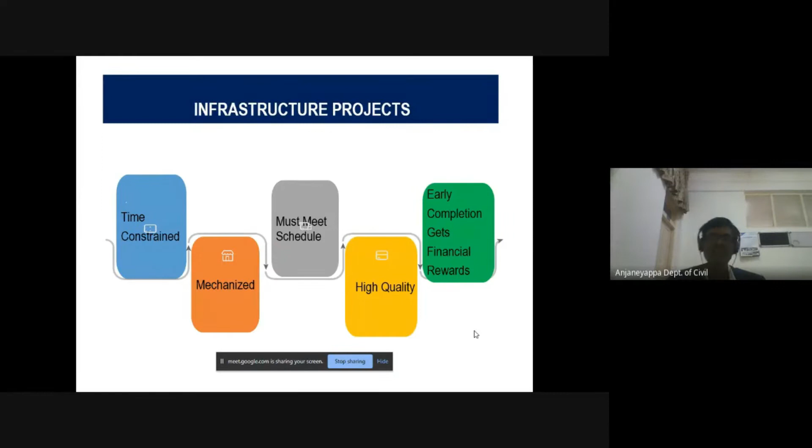Thank you. We cannot think of this high quality without these plants and machineries.

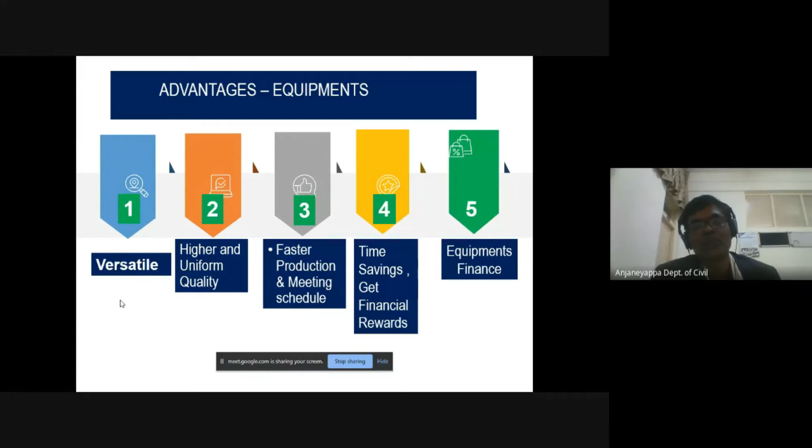There are some advantages when we are talking about these machineries for the road projects. The majority of these machineries are versatile, they can be used for different types of activities. Let's say the grader can be used for grading, can be used for mixing, can be used for even cutting. And the equipment delivers higher quality, not just higher quality products but also uniform quality. That's very important. And then we can meet the schedule, because production will be faster, construction will be faster, and because of this faster production we can save time. So many times, as I said, today's contracts have early completion financial rewards.

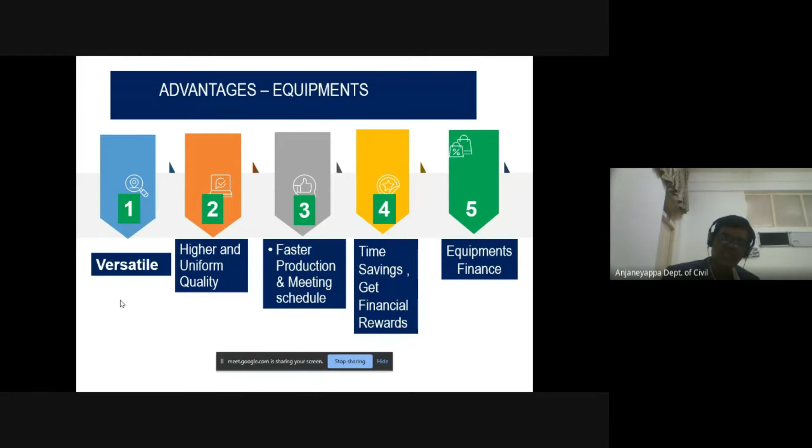When we look at the cost of equipment, as I said, they are very costly, there's no doubt about that. But again, for the owners, there are equipment financing institutions, so getting finance for these equipments is also easy. These are some of the advantages when talking about the equipments.

Having said the advantages, there are some limitations also. As usual, these equipments are very costly - the cheapest equipment, our roller, is about 20 lakhs. Also, underutilization increases the cost of the project - though we induct very costly equipment and plants for road projects, most of the time they are underutilized. This underutilization increases the project cost, and operation and maintenance cost is also very high for machineries.

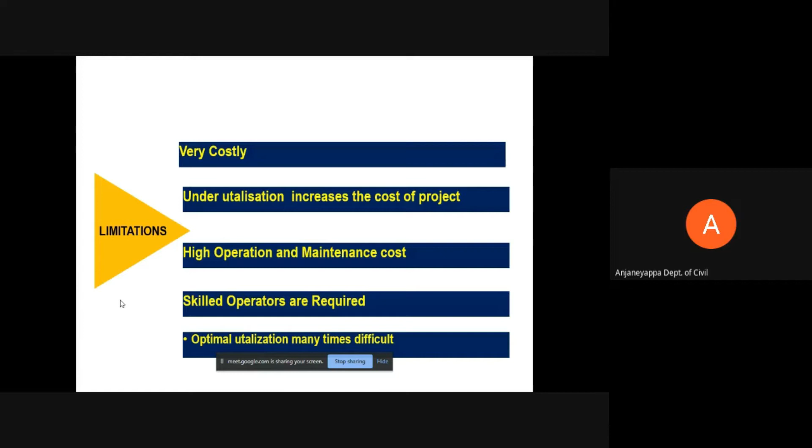It's about 15%, as a thumb rule. So a huge amount - if 15 crores it runs, and all highway projects, you may be aware, these people talk only in 100 crores, 200 crores, 300 crores. Even the smallest project, the PMGSY project, will generally be about 4 to 5 crores. So the operation and maintenance cost will also be high. More than anything, handling the operation of these plants and machineries requires skilled operators, and to be precise, there's an acute shortage of skilled operators in the industry for various reasons. So, some of the limitations.

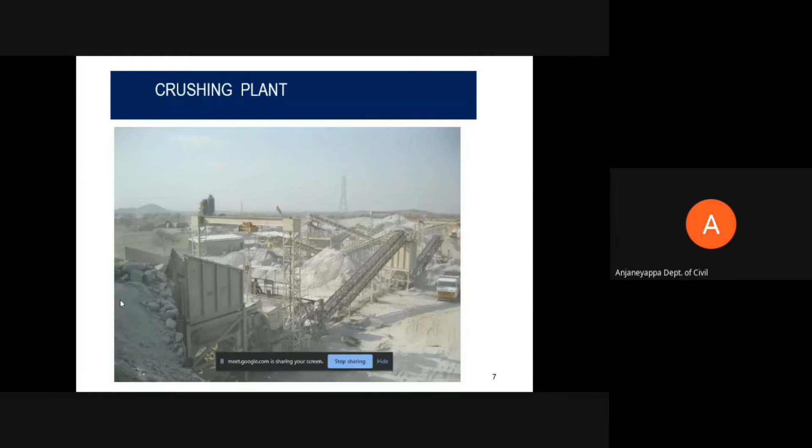Now, let's go to the plants, some of the important plants. This is a view of a crushing plant, an aggregate crushing plant. Go to any road project site, you'll find a crusher, and this is the crushing process from the quarry.

The rock is drilled, then blasted, made into bigger boulders, and these boulders are transported to the crushing plants through tippers. They are fed into primary crushers, and from this primary crusher it gets into the secondary crusher, and from the secondary crusher the output will be of construction size. Many times this secondary crusher output is again subjected to the tertiary crusher, maybe to control the shape and to increase the fines. That's how the crushing plant works - the boulders from the quarry are subjected to 2-3 stages of crushing.

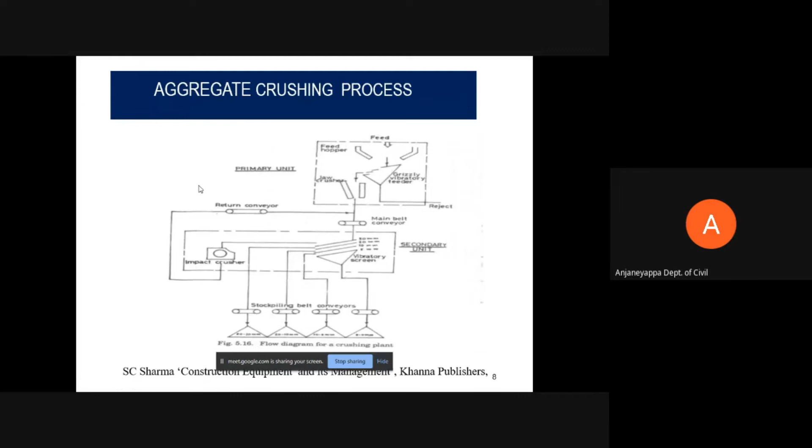If you want to classify the crushers, they can be classified based on mobility, or they can be classified based on function. When we classify aggregate crushers based on mobility, they can be classified as mobile crushers or stationary crushers. What is the advantage of these mobile crushers? The crushing can be done at various locations.

Many times it so happens for projects that we may not get the source of rock in one location because a huge quantity is required. So when there is a mobile crusher, this can be moved - mobility will be easy, it can be moved from one source to another, so crushing can be continuous and shifting is easy. That's the biggest advantage of mobile crushers, but there is a limitation - the output of these crushers generally will be less compared to stationary crushers.

Based on function, crushers can be classified as primary crushers. Generally, jaw crushers are used for primary crushing. In primary crushing, the input size is the boulders, generally varying from 600 to 1000 mm, around 1200 mm. The output size is our soling size, about 90 to 100 mm. So we feed the boulders into the primary crusher, and the output we get is of soling size.

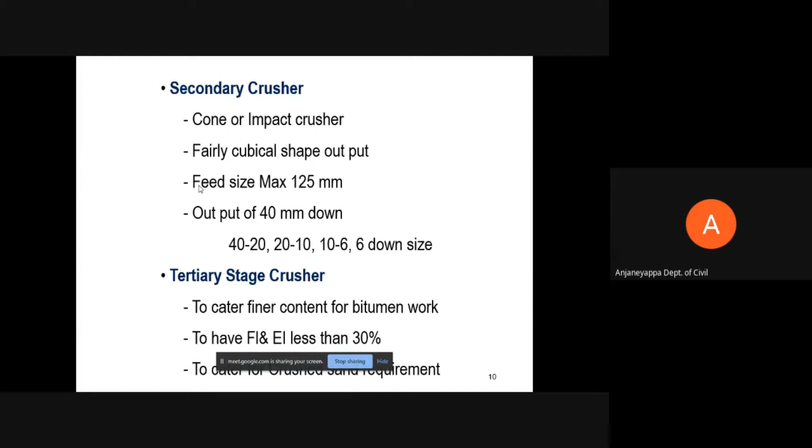To have good shape, many times the elongation and flaky particles will be more in the output. So to control that, the tertiary stage crushing is carried out.

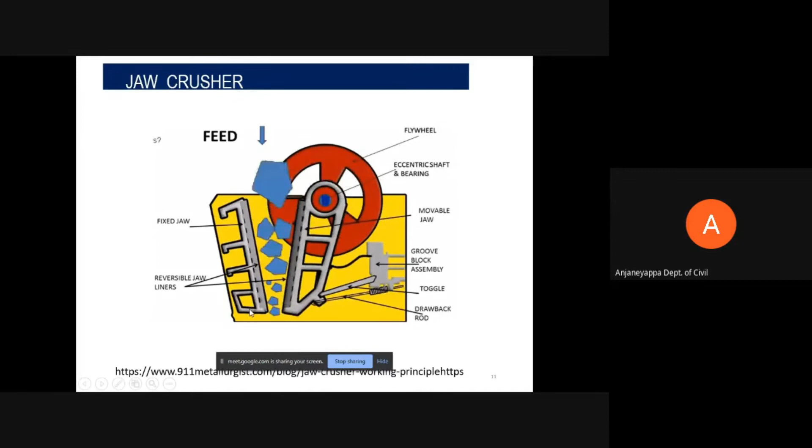This is another view of the jaw crusher. In the jaw crushers, as you have seen in the picture, one is the fixed jaw, the other one is the movable jaw or the swing jaw. These jaws are made up of heavy duty cast steel or manganese chrome steel so that they can sustain the high vibration, wear and tear during the compression.

More is the production that we get when the feed is of mixed size. Whatever the feed input size, this applies even for other stage crushers also. Always when mixed size aggregates are there in the feed, we get more output. Uniform size always gives lesser output. Another important requirement to have good production is the feed should be uniform. Most of the time it does not happen - sometimes there is more feed, sometimes there is no feed, sometimes there is underfeed. So giving uniform feed to the crusher always results in more production.

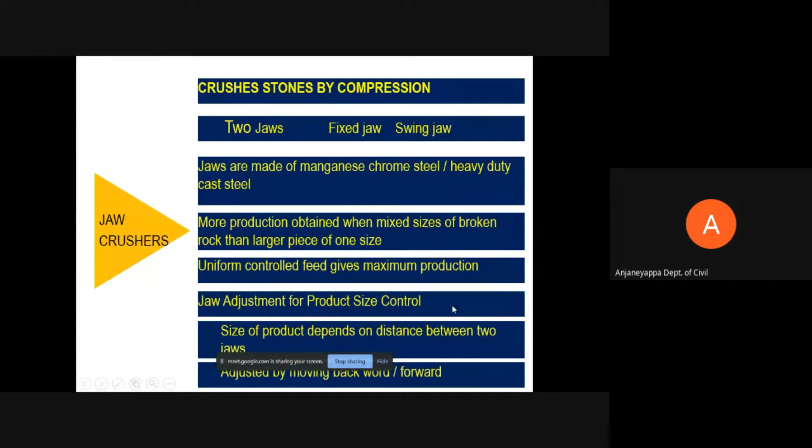So we need to adjust the jaws to control the size of the output. We can have three combinations between the fixed jaw and the swing jaw. One is straight jaw, where both the fixed jaw and the swing jaw are straight. The advantage of this combination is the wear and tear will be uniform, and the disadvantage is the rocks, the output, hangs up here. Because of that, the output may reduce many times. Another disadvantage of having both straight faces is it produces more elongated or flaky particles.

The other combination for the jaws in the jaw crusher is one kept straight, the other kept curved. As I said, uniform feeding is not always possible, so in such cases this is advantageous, and the crushing area increases here, so output will increase.

The other combination is both jaws kept curved, both fixed and swing jaw. The advantage is it reduces the choking, and this combination is helpful when feeding is less or not uniform. The crushing height is increased here compared to straight jaws, the crushing area is increased, and the flaky and elongated particles are further reduced if this kind of combination is adopted in the jaw crusher.

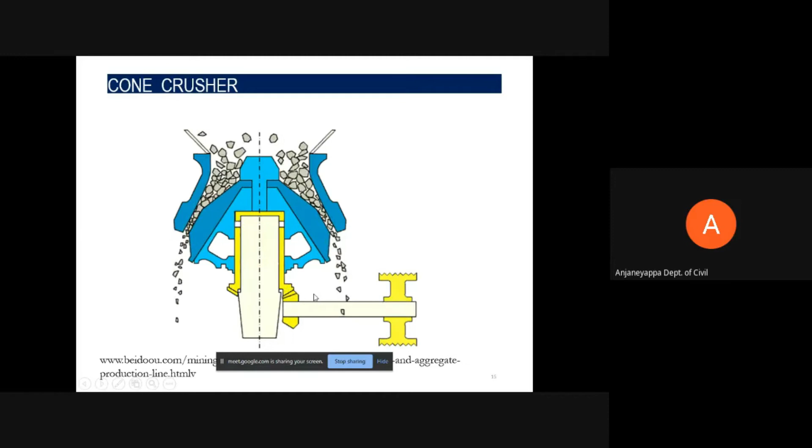This cone crusher can be used to generate construction size output, meaning we get whatever size is required for construction. The gyratory head generates the gyratory motion, and the swinging motion is produced by the eccentric sleeve.

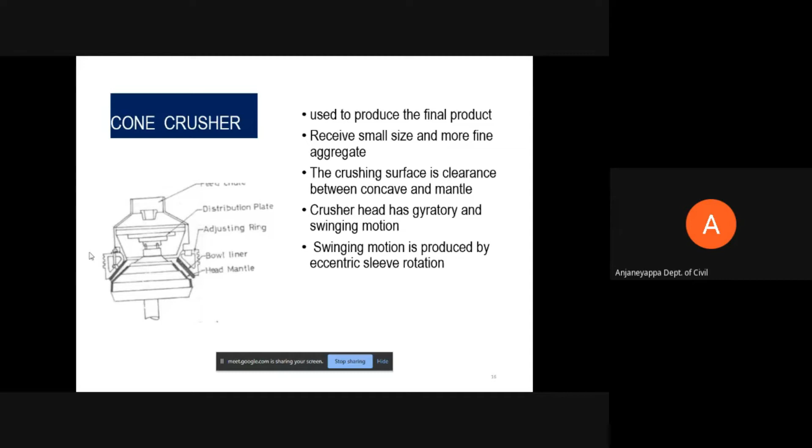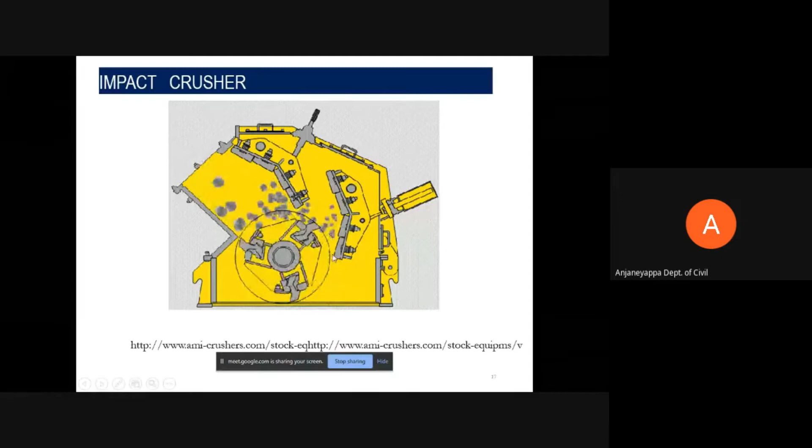The other type of crusher is the impact crusher. This is also used as a secondary or tertiary crusher. This is where the input from the secondary or primary crusher gets in, and you can see the hammers, and this gap between the hammers and the rotor dictates the output size.

So both the jaw crusher and the cone crusher break the aggregates by compression. Here in the impact crusher, it is impact which breaks the aggregates. This impact crusher can also be used as a primary crusher, and impact crushers are used when materials are too hard and when good shape of aggregates is required.

The input is fed here from the top, and the material is struck by these rotating hammers in these chambers. These hammers repeatedly throw the material, and the impact generated is instantaneous. This instantaneous breaking eliminates the possibility of hidden cracks in the output, which is desired.

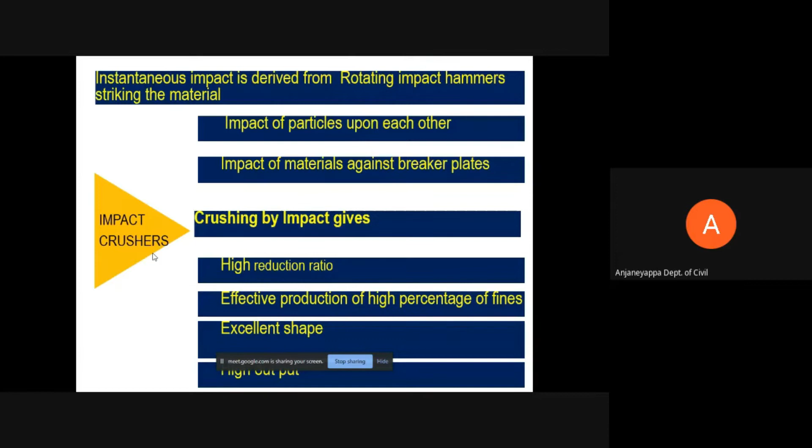The impact crushers have a high reduction ratio. That means the reduction ratio is very high, and the biggest advantage is we get a very desired shape and also very high output from the impact crusher.

If you look at the reduction ratio of a jaw crusher, it is 4:1 to 9:1. This reduction ratio is the ratio of feed size to output size. Here it is 4:1 to 6:1, and here it is 15:1 to 20:1.

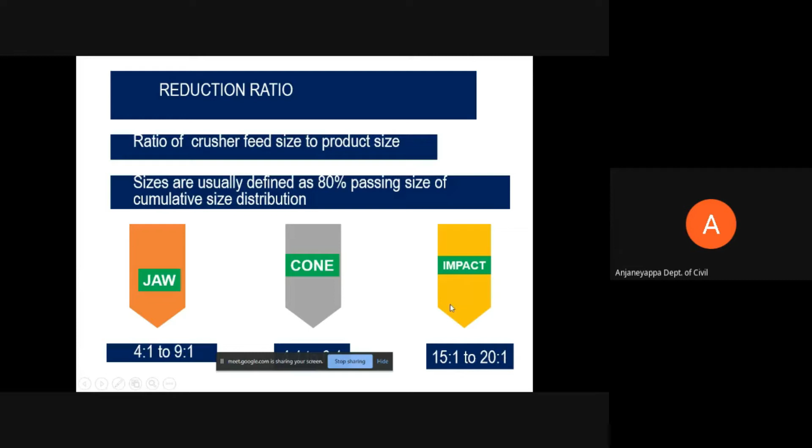So a high reduction ratio is expected, and it is very important in crushing to adopt step reduction. A large difference between the input size and output size requires huge energy, and if that difference is very high, excessive fines and excessive sand are also generated. Hence it is always desired to adopt stage crushing.

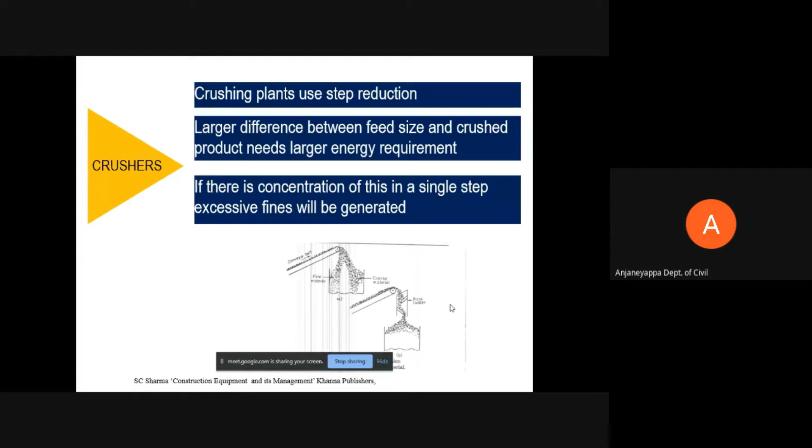The output of the crusher depends on the jaw opening. Lesser the opening size, lesser will be the output. What is the end product size required? Bigger size means more output; lower size requirement means lower output.

The kind of rocks, whether the input is softer or harder quality, dictates the output. Then feeding efficiency - whether feeding is continuous or not - matters, as more and uniform feeding always gives more output. It also depends on density: more density means more output. Water absorption - if water content is lesser, output will be more - and specific gravity is inversely proportional. Smaller size feed always generates more output.

So that's about my crushing plant.

Then comes my pug mill or the wet mix plant, used for the production of wet mix, which is widely used as granular base in our country. So this is the wet mix plant at the pug mill.

You can see these are the hopper bins, cold aggregate feeder bins, and there's a conveyor belt, a pug mill or mixing unit, and of course a control panel.

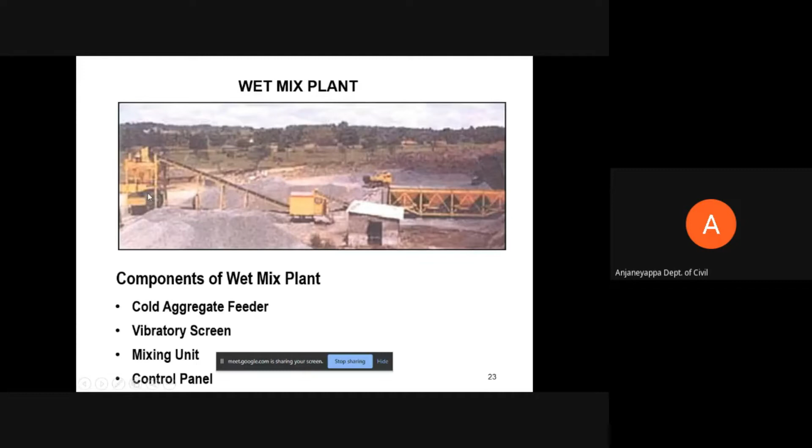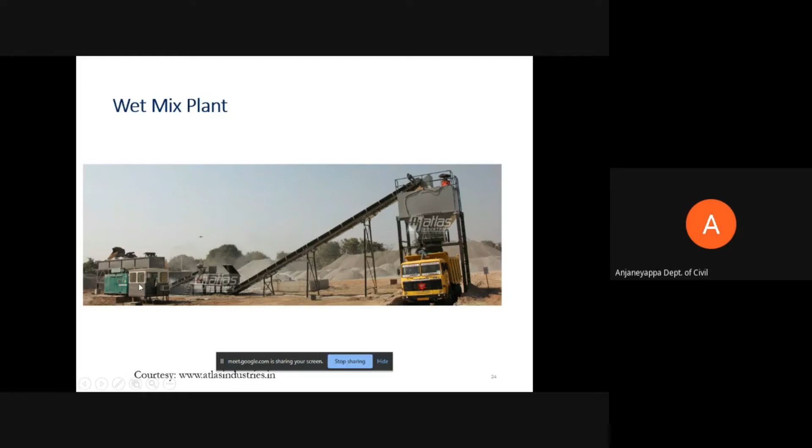So this is another view of the wet mix plant, and all the operations are controlled by the control unit here. This is another view.

Then comes our hot mix plants, used for production of bituminous mixes. There are different types of hot mix plants: mini plants, portable plants, and stationary plants. This is one way of classifying hot mix or bituminous plants. The other classification is drum mix plants and batch mix plants.

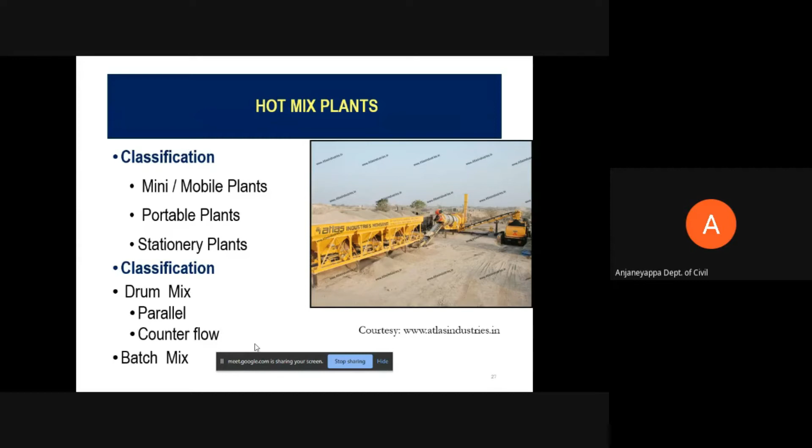Let's look at these mini plants. The name itself indicates they are used for small road projects, and most of the time these mini plants are used for maintenance activities. They can be moved easily on pneumatic wheels, and can be easily installed and transported in a tipper or big trailer - that is the big advantage. The main disadvantage is they are not suitable for major projects, as the output is less from these plants.

Then comes the portable plants. Again, these portable plants can be transported easily on road or by rail. The capacity varies starting from 10 to 45 tons per hour, and this can be used for a job site of 30 to 40 kilometers. The biggest advantage of these portable plants is they can be shifted easily from one project site to another.

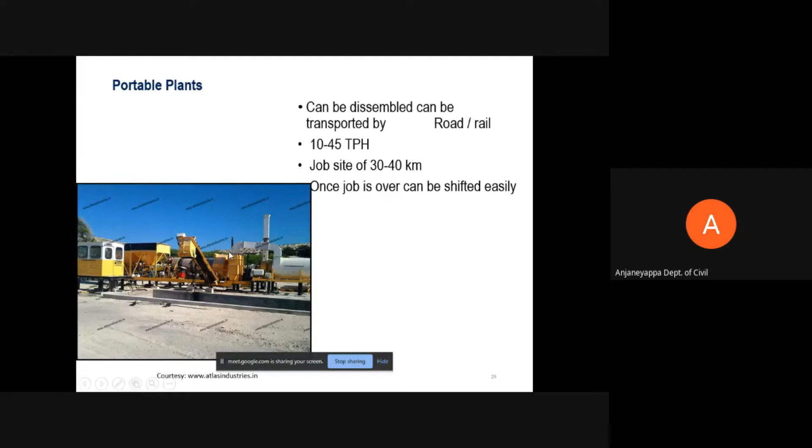So then comes the other type of hot mix plant, the stationary plant. These stationary plants are installed on a permanent site. As I said, these stationary plants have a capacity of generating anywhere from 60 TPH (tons per hour) to 200 tons per hour, or even more, 300 also. These are used for major road projects and suitable for a job site of 50 to 60 kilometers or even more.

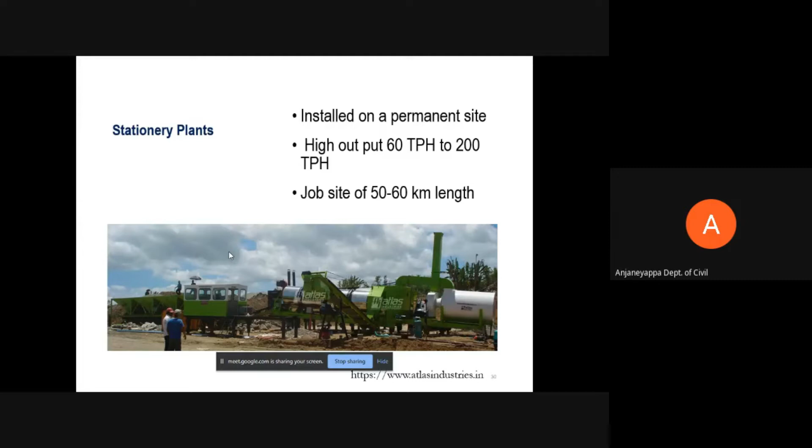The other classification in a hot mix plant is drum mix plants and batch mix plants. So this is a typical drum mix plant. You have hopper bins, drums, a mixing unit, and this is the loading unit, and the control room.

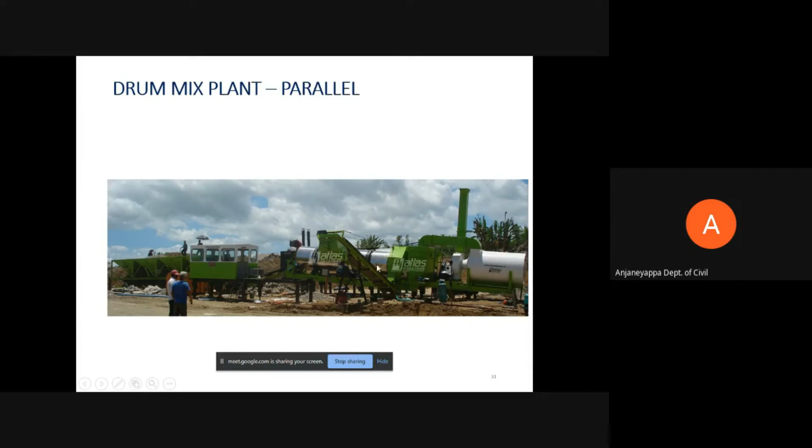In the drum mix plant, we mix from these aggregate bins and get into this burner. If we want the RAP mix, any recycled material, it is added at the end of this burning and heating, then taken to the storage bin and to the loading bin. From the hopper bins, the aggregates get into this drum, where they are heated to the required temperature, and from here the materials get into this drum. Bitumen is pumped here, aggregates and bitumen are heated together, and then it goes to the loading unit.

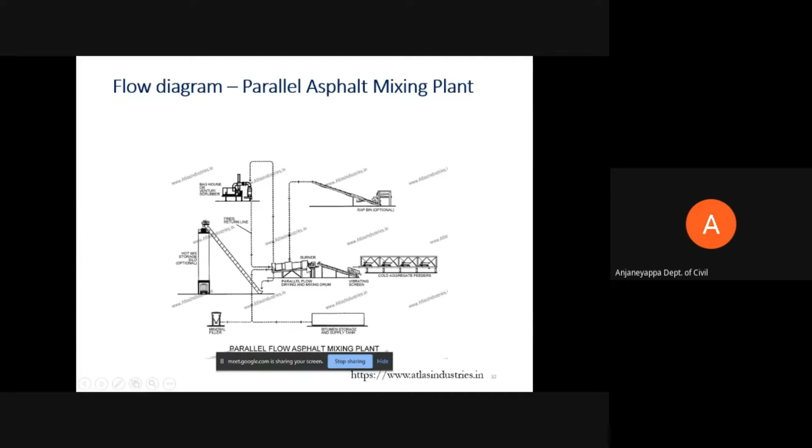Then comes the weighbatch plants, or batch plants. These are typical weigh batch plants with hopper bins, a drying unit, and a mixing unit. From the hopper bins, aggregates are fed into the drying units where they are heated to the required temperature. After heating, the aggregates are elevated through the bucket elevator to the screening unit. The hot aggregates are sieved first, then weighed, and after weighing, fed into the pug mill or mixing unit, where preheated bitumen is also fed. Both are mixed, and the mix is unloaded onto the tipper or to the storage silo.

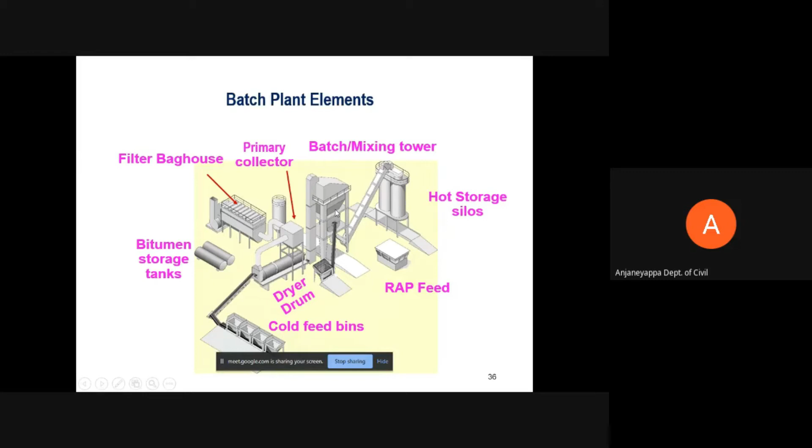The aggregates from the hopper bins are fed into the dryer drum, then taken to the screening, then weighed, and then mixed. This heated aggregate from the dryer unit is sieved into separate size bins, 20mm, 12mm, 6mm, and so on, and separately weighed. Then, into the mixing unit, the preheated bitumen is pumped.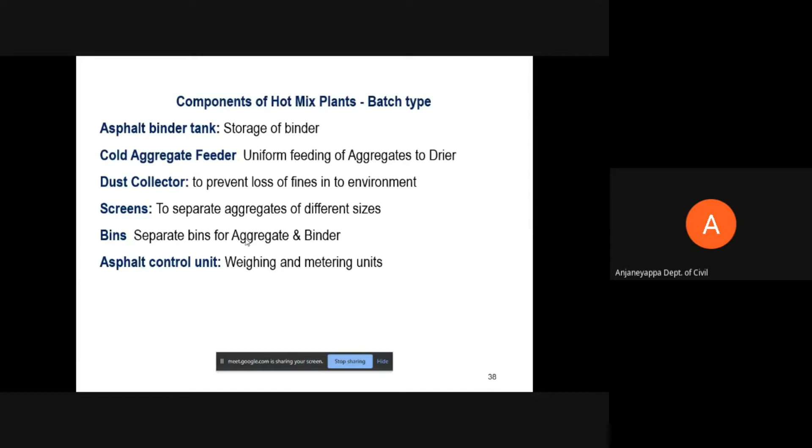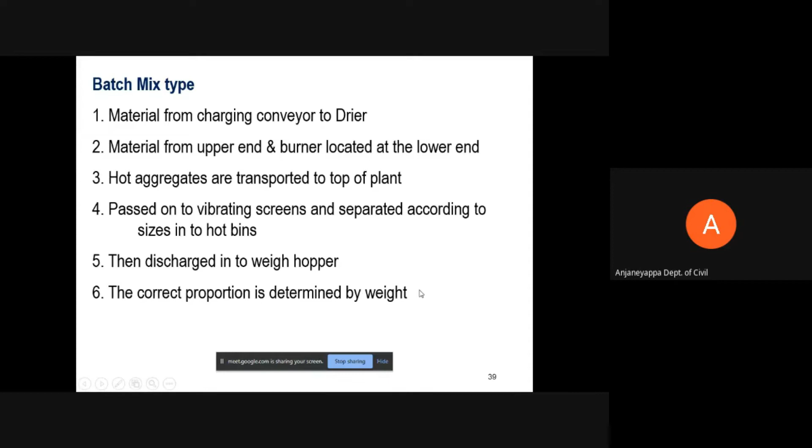So we have the bitumen storage tank, cold aggregate feeder bins, dust collector, screening, aggregate bins, and control unit. All these mixing operations, starting from the dryer, the hopper bins, aggregate hopper bins, cold feeder bins, to the output, happen in about 30 seconds.

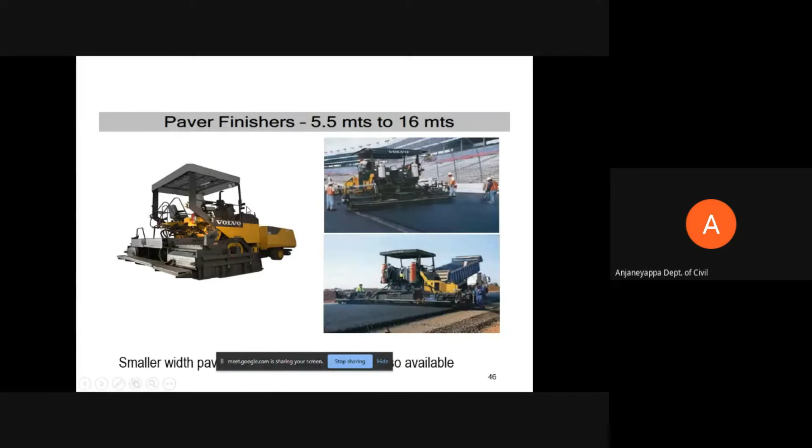So that's about the hot mix plants. Now let's discuss the pavers. There are different types of pavers available, starting from 2 meters to 16 meters. Generally the common pavers are 5 to 9 meters; this is an 8 meter wide paver. If you take any paver, generally it has two sections: one is the tractor, the other is the screed, and these two components are connected by a tow arm.

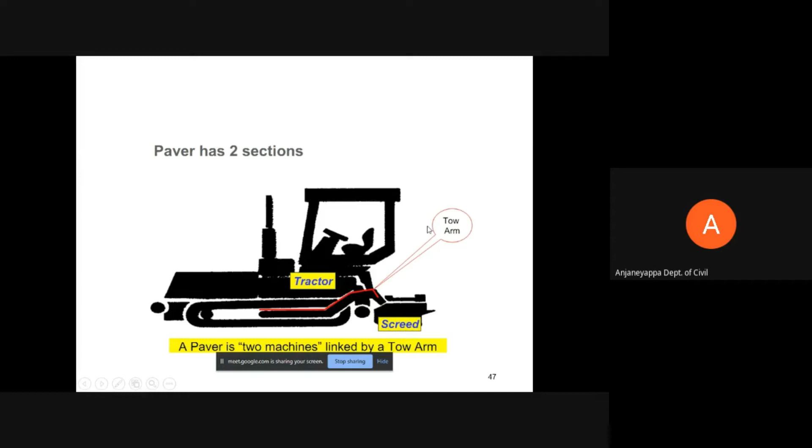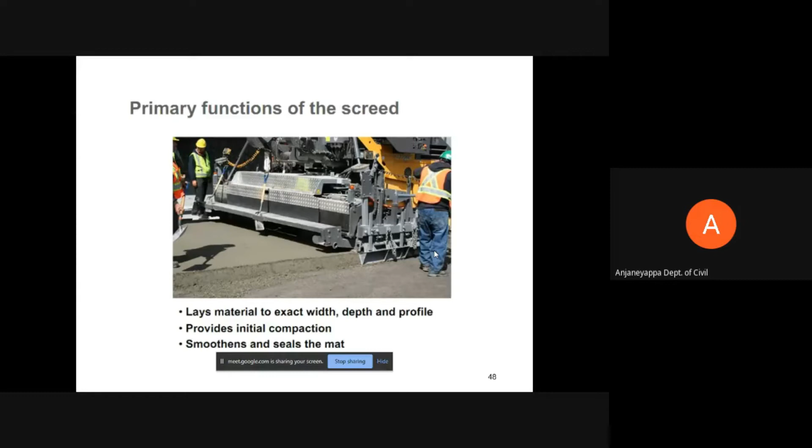One is the track mounted paver, the other is wheel mounted paver. There are advantages and limitations of these two categories. If there is a wheel paver, mobility and performance are easy, but the only limitation is it cannot be operated on relatively soft bases, and maintenance is also high compared to a crawler or track mounted paver.

The advantage of a track driven paver is we can pave higher lift thickness, larger widths, and it can be operated on relatively soft bases. Let's remember, paving is not done on soft bases - I am using the term relative. It can be effectively used on gradient surfaces, whether up gradient or down gradient, compared to the wheel driven paver. There are two types of screeds attached to the paver: fixed and variomatic.

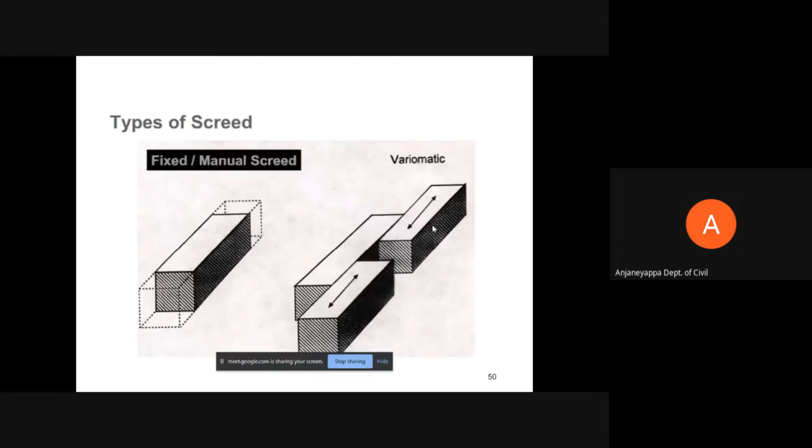Sensors - today paving is mostly done by sensor pavers, because all organizations ask for sensor pavers. Different types of sensors are available in the market: contact sensors, non-contact sensors, or a leveling beam.

This is a contact sensor - it floats on the reference surface, and this is sensed by the paver, and accordingly we get the profile. The non-contact sensor is made to sense the reference surface, and as per the reference surface we get the surface. There is also a floating beam which can rest on the reference surface, mostly the receiving layer. In all these cases it is the receiving layer whose profile is taken as reference.

Otherwise, this sensor can be made to sense the guiding wires as the reference.

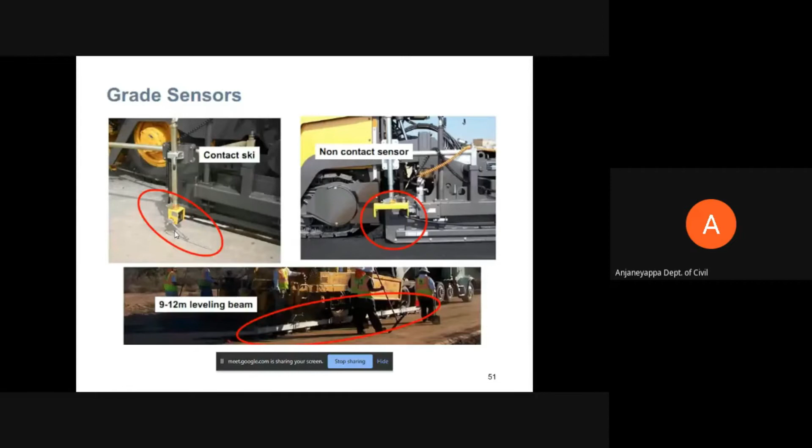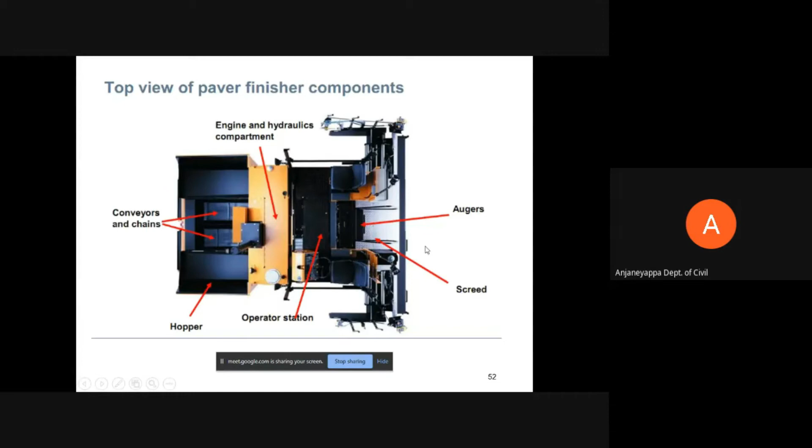These are the components of a paver. There are augers here, and this is the hopper bin - these two are very important: the screed, the augers, and the hopper bins. This is another view of the components: hopper bin, auger, screed, and so on.

What is more important when we talk about paving is maintaining a uniform, constant head of material in front of the paver - this is very, very important. Whatever be the type of paver, maintaining a constant head in front of the paver is essential, otherwise we may not get a uniform surface.

If the head of material in front of the auger is more, the thickness of paving automatically increases, which may result in non-uniform thickness and non-uniform profile. Also, when the head of material is less in front of the auger, the paving thickness reduces, again resulting in non-uniform profile. So maintaining a constant head in the paver is very important, and paving is an art.

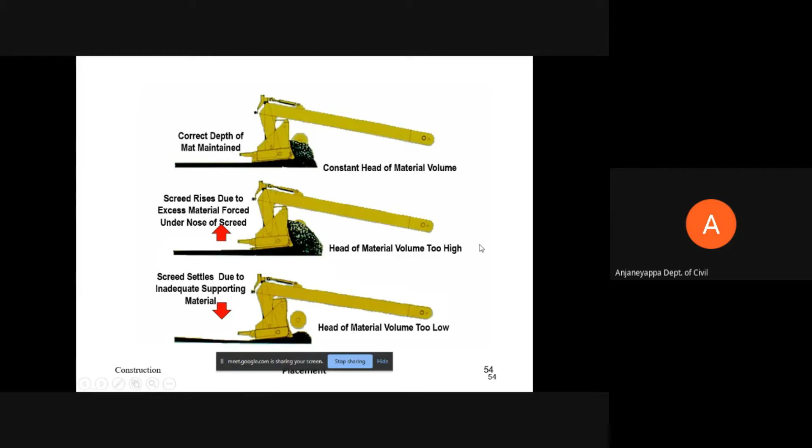More than engineering, paving is an art, and paving is a continuous process. Any paving should not be stopped unless there is a genuine reason. Once we start paving, we should not stop - we should not stop unless warranted. Only then do we get a uniform surface.

Whenever we stop the paver, it creates a weak plane, and the first failures generally occur wherever we stopped, because wherever we stop and start the paver, we get a temperature segregated surface, or aggregate segregation will be there - totally we get a weak plane. So as far as possible, paving should always be continuous, though most of the time this does not happen. So segregation is very, very important.

Most of the time, whether it is any bituminous mix, gradation is important. Hanging up of the aggregates in the feeder bins, maybe because of moisture or so, results in non-uniform mix which may not meet the required gradation.

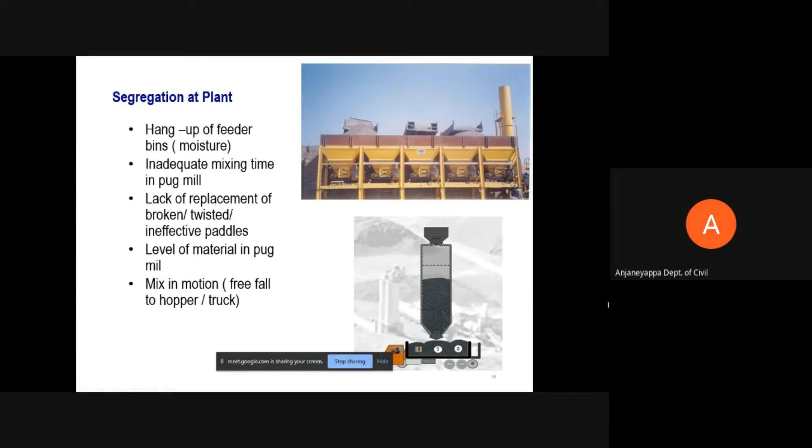This picture shows how the mix is loaded in the tipper. First loading is done here, second loading done here, and third heap unloading is done here in the center. This reduces the segregation to a certain extent.

So that's the segregation in the plant, and this segregation also happens in transportation. During movement of the mix in the tippers, the coarser materials roll down and segregation can happen. Segregation is the separation of bigger size particles from smaller size particles, and this cannot be avoided completely, only minimized.

Controlling segregation is very, very important - I would say the most important thing. So we should not carry a small batch of mix in a large truck. Whenever we are carrying the mix in the tipper, it should be full.

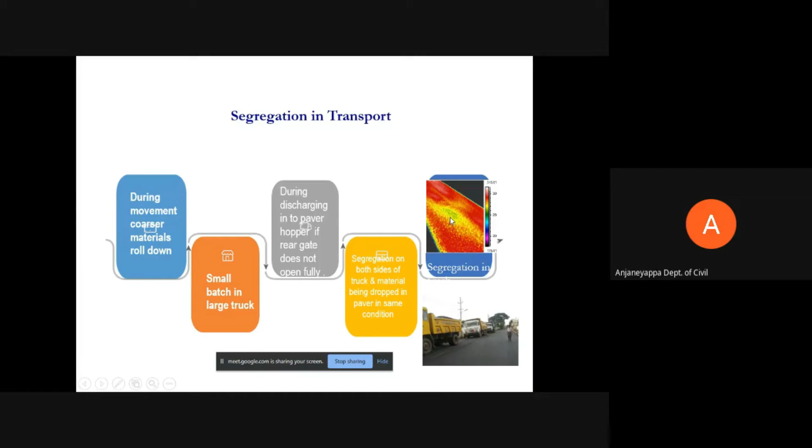Even during discharging the mix from the tipper to the paver, if the tipper gate is not opened properly or fully, then also segregation happens. So segregation is one part. As I said, temperature segregation is another issue we need to be very careful about.

The hopper should not be emptied - material should always be maintained in the hopper bin of the paver. This picture shows an empty tipper - still work is on, and the tipper is empty, and the paver hopper is empty. This results in a segregated surface, non-uniform profile, etc.

So maintaining this is the reason paving should always be continuous, and to have this continuous process there should be synchronization of all activities, starting from the hot mix plant, the number of tippers required, the distance, and then paving. All this should be coordinated or synchronized, so that once we start the paver, the paver does not stop.

So the paver speed should be adjusted based on the distance from the hot mix plant to the job site and the capacity of the hot mix plant.

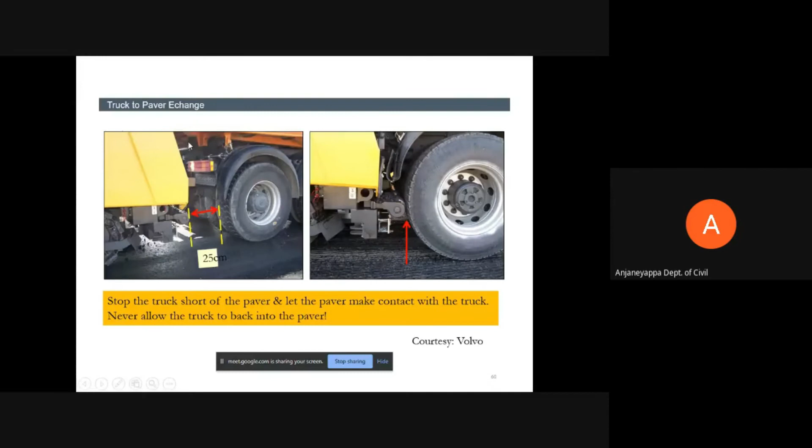When loading material onto the paver from the tipper, the tipper should move slowly near the paver, and the paver will come and join the tipper. The tipper should be at a place, and the paver slowly comes and joins it, then the material should be unloaded. Otherwise there'll be an impact, resulting in a non-uniform surface.

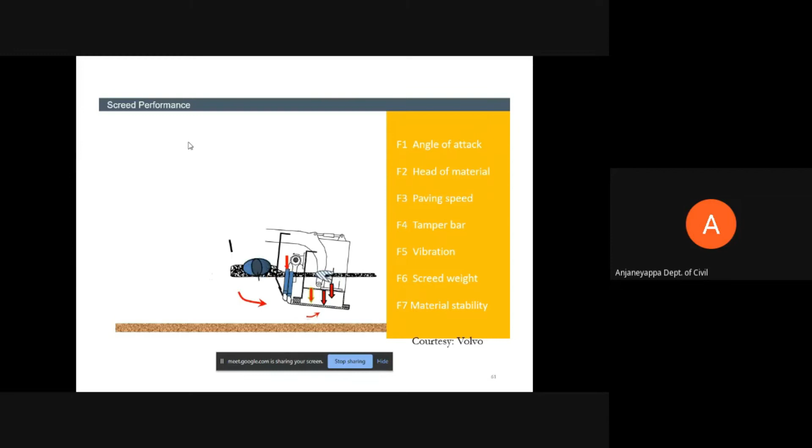So whenever we want to increase or decrease the thickness, that change does not happen instantly - it takes some time, some distance.

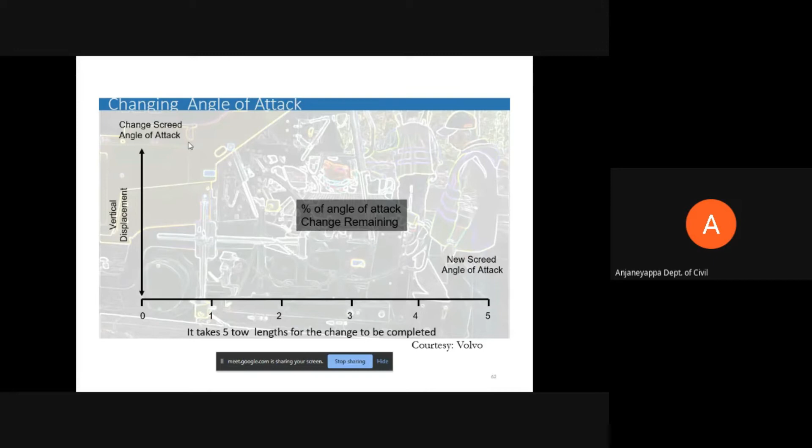Generally, about 15 to 20 meters is required to change the thickness in the case of a manual paver. In case of a sensor paver, about 10 meters length is required to make that change happen. So instantly by operating the lever or the gear, changing the thickness will not happen.

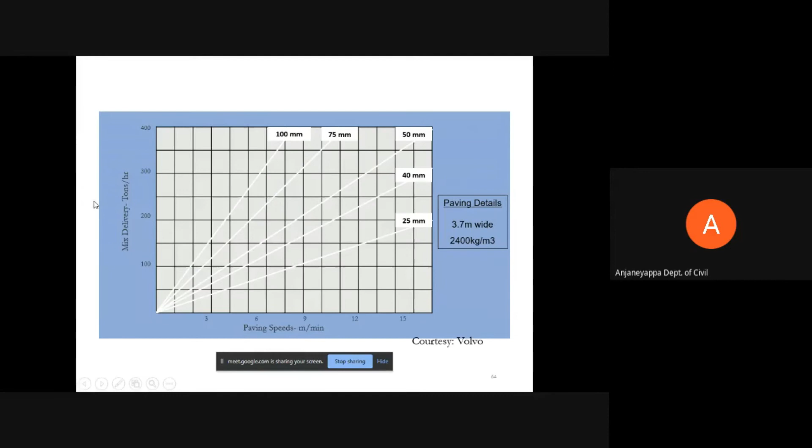So depending upon the paver speed, the plant capacity, and the thickness, we should decide the paver speed - the thumb rule. Let's say my plant capacity is 100 tons, my paving thickness is 40 mm, and my speed should be 3 meters per minute per lane, assuming my density of material is around 2400 kg per meter cube. So the paving speed is adjusted based on the thickness and the capacity of my plant.

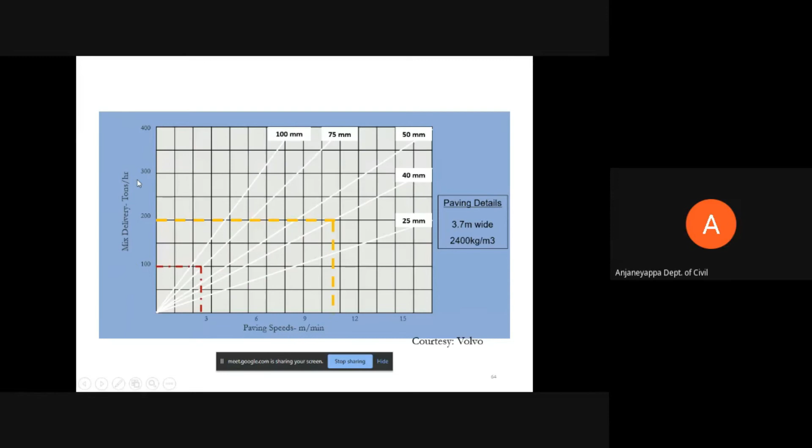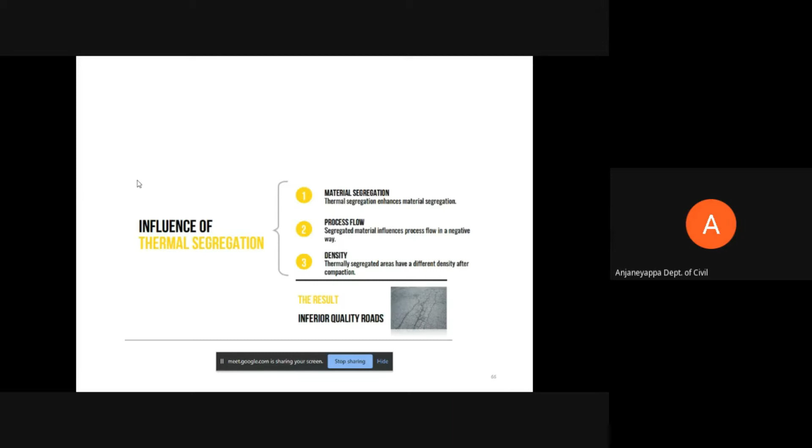Thermal segregation can happen at many places. This thermal segregation happens because the bituminous mix is thermoplastic and highly dependent on temperature. So controlling the temperature is very, very important - otherwise it results in a poor quality surface.

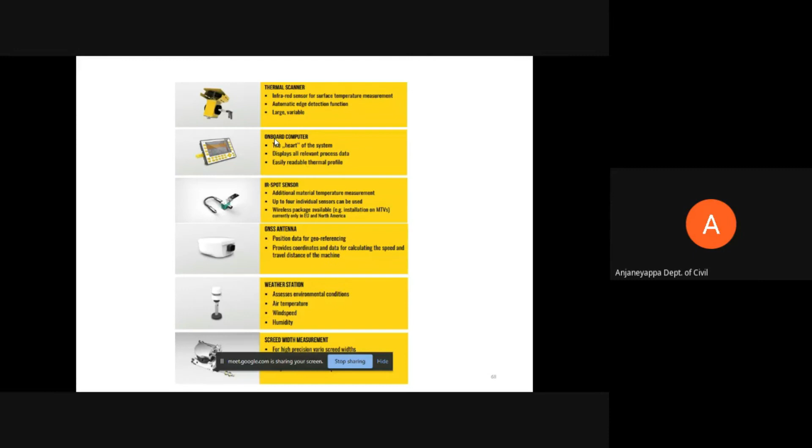By controlling the temperature, we can have different adjustments. These come as extra attachments to the paver - antennas and thermal scanners - so that temperatures can be scanned, and on the paver board itself the operator can see the temperature, the weather, and the width, etc. All these can be readily seen, and can also be readily seen in the centralized plant. This helps in controlling the quality, as well as in managing the project.

Then comes our rollers, the compactors. There are 4 types of forces that we impart to the rollers: static, kneading, impact, and vibratory or oscillation forces. The static and kneading forces are lower forces, while the impact and vibratory oscillatory forces generate higher forces, so the density also will be more.

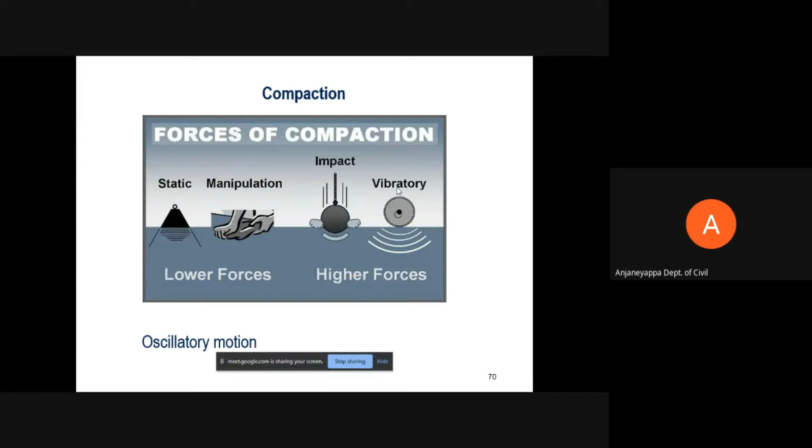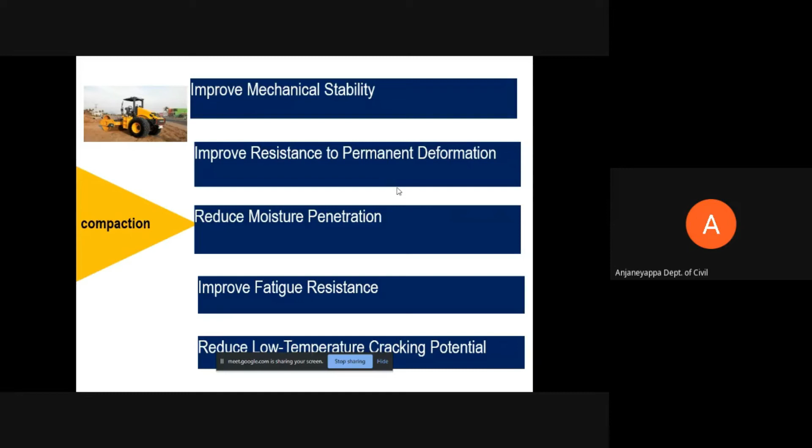The intention of compaction is to increase the stability of the asphalt mix, increase the resistance of the mix towards permanent deformation, reduce moisture penetration, increase fatigue resistance, and reduce the low temperature cracking potential.

There are different types of compactors: static compactors, kneading compactors, vibratory or oscillatory compactors, and light compactors. Static compactor generally means the soil compactor. All compactors can be operated both in static mode and in vibratory mode. If you switch on the vibratory mode, they act as vibratory rollers; if switched off, they act as static rollers.

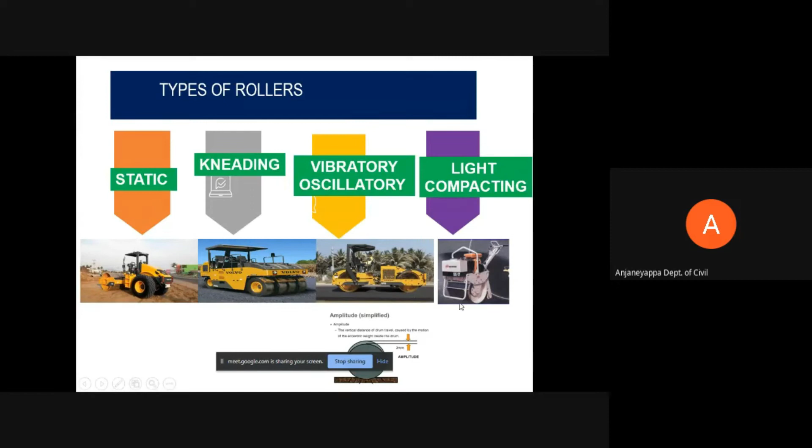Kneading compaction is generally done by pneumatic rollers. The force is generated by kneading action, while vibratory or oscillatory motions generate high forces. For constrained areas, we go for handheld equipment.

When talking about soil compactors, when is it called a soil compactor? When there is only one single drum, then we say it's a soil compactor. If there are two steel drums, then we say asphalt compactors or double drum compactors.

For a static roller, the compaction efficiency or output depends on the gross weight of the roller, the speed, the material type, and the thickness of the material. All these govern the compaction output or density level.

For a kneading compactor, it is articulated and cannot be operated in vibratory mode. Whatever gaps are seen in the front row on the rear side are filled by rear side tires, making it a continuous operation. Whatever gap is seen is covered by the rear end pneumatic wheel.

This compaction is by kneading, and the big area inside can be ballasted using any material to increase the weight of the roller depending on density requirements. Generally, pneumatic rollers are not used to increase density; mainly they are used to get the desired texture or to seal the surface. This comes under asphalt compactors, both of which are steel drum.

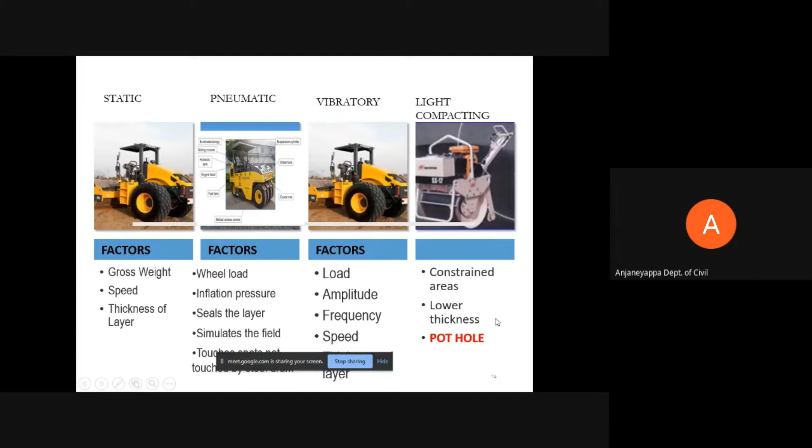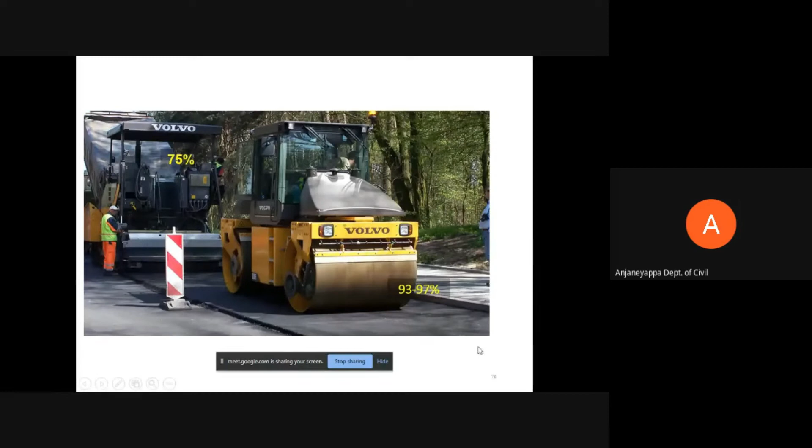The majority of the compaction is done by the paver itself; only the remaining compaction is done by the rollers. About 70 to 75% is done by the paver, and only the remaining portion, about 20-25%, is done by these rollers.

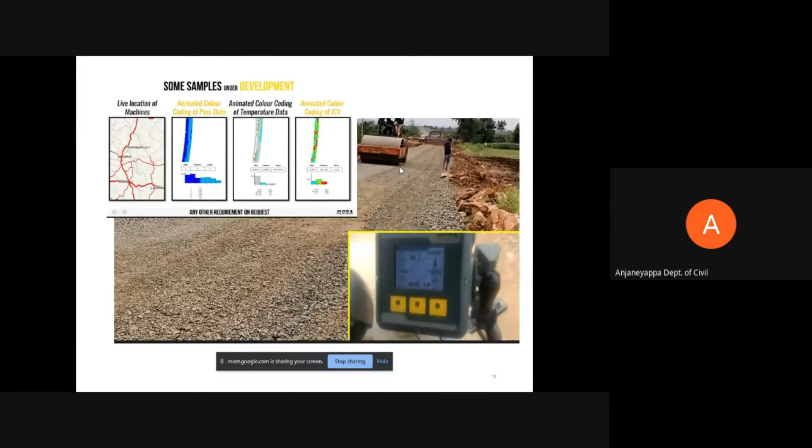There are customized attachments to show the density of the bottom layer in the roller itself. These additional attachments can be fitted on demand, giving the live location of the pavement and the temperature or density achieved, so that we can optimally use these machines and stop once the required density is achieved. All these can be used as additional attachments with minimal investment cost.

There are some precautions to be taken during rolling. Maintaining uniform speed is very important, and we should not allow the compactor to stand. Jerky starts, sudden braking, and sudden changes in maneuvering are not desirable, as that damages the surface.

This small amount of detergent or vegetable oil to be used, other than water, and the performance chart of these equipments needs to be taken from the equipment manufacturers. Generally, neither they give nor we, the customers, ask for it. That's really a good thing we should start doing from now onwards.

So there are some big concerns when you're talking about these equipments. We have talked about all these equipments.

But again, when we're talking about these plants and machineries, there are some constraints. Say, for example, my crusher is 200 tons per hour, pug mill is 100 to 200, my hot mix capacity is 200, and my paver capacity, compactor capacity, I've taken just on the lower side, 500. So synchronizing the capacities of machines is very important, otherwise one machine will be overutilized, another underutilized, so the optimization will not be there.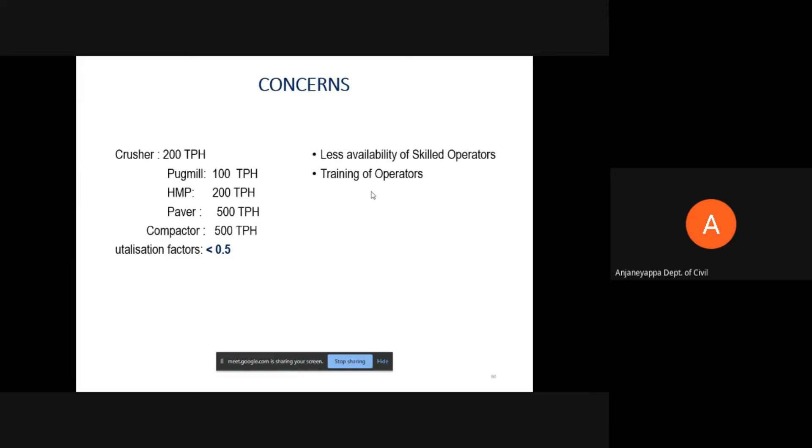So that is one biggest concern, and as I said, skilled operator availability is very, very less in the industry, and training this operator is another important requirement in the industry.

Another concern with these plants and equipments is the diesel consumption, the fuel consumption, which is very high. As a thumb rule, it comes to about 10,000 liters per kilometer per lane for new construction. Otherwise also, if you look at the fuel consumption for these equipments, from crusher to compressor, it varies from 5.5 liters to 60-70 liters per hour.

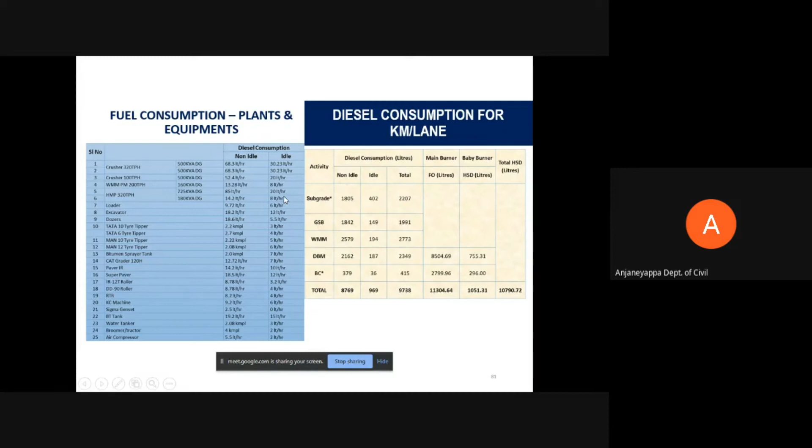Once we start, a huge quantity of diesel is required. That's what we need to understand.

So fair knowledge of these plants and equipments is most important for the project manager, the site engineer, or even for the operators. Otherwise, optimization of the project resources will be difficult. This knowledge is very important to keep the financial condition of the project healthy, to increase the profit, and to complete the project as per schedule. This knowledge of plants and equipment is very, very important.

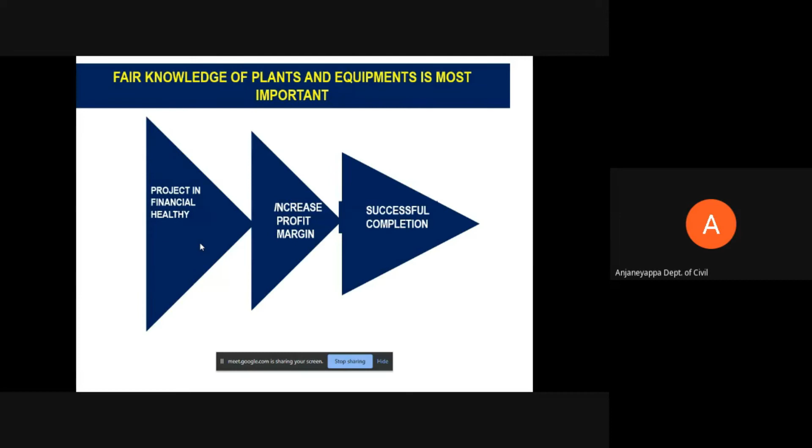One small concern I missed in this slide is that a trained operator is very important, because they are something like cooks. We have all these beautiful, costly machineries, but at the end of the day, the operator is very important. If we do not operate in the right way, that results in poor quality mix and poor quality product. That's very important when we talk about plants and machinery.

So I think my presentation is complete now. Any clarifications, I'm happy to share. Over to you, thank you.

Thank you, sir, for your wonderful presentation. You have started with the crushing and ended with the paving. You have taken the entire life cycle of the machinery, all the machines used for highway construction, and it's amazing, including the technology, the applications, how it works, including the PTR, the pneumatic tire roller.

See, highway construction happening in this space without machinery is not possible. As a civil engineer, we think why we should understand about the machine. Mechanical engineers are there, they will do the machines, but actually they manufacture the machines. The application is for the civil engineers only. Mainly the construction professionals who are there in the project have to decide the right combination.

As sir told, we have to select the right combination. It should not be overutilized or underutilized. Optimum utilization is a must. As he has shown, the pug mill and the paver have a difference - pug mill has a capacity of 100 metric tons, and your paving capacity is 500. At that stage, it is underutilized. So as an engineer, we have to plan for maximum output.

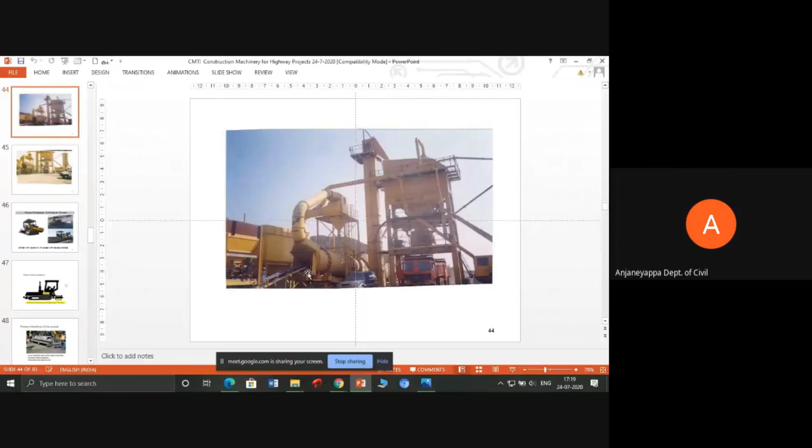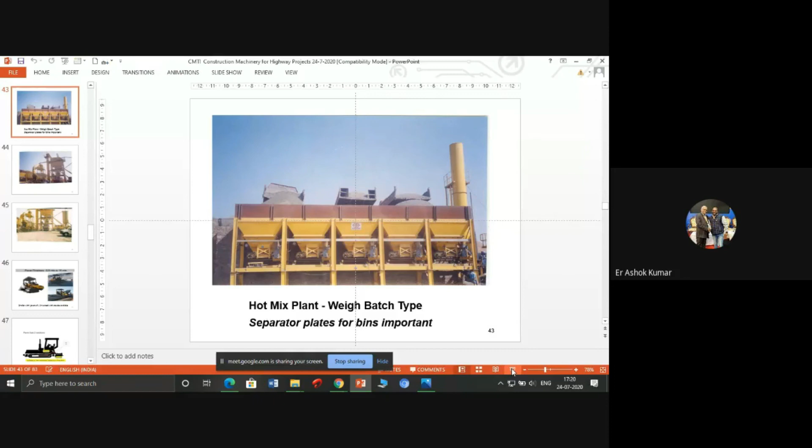Yeah, 40. Yes, see this 43, is this? Sir, it is not, one second. Audience, is it visible? Yes, this sir, is this the slide, sir? I will check with him. Syed, is this the same as what you are asking, or the next slide? Syed Haider. No, you have to pin his presentation, then only you can see Ashok Kumar. One second sir, I think. Yeah please, can you explain the flow chart of slide number 43? I think this flow chart is not there. No? Maybe is this? Yeah, it may be. It may be that one, sir, the earlier one, this one? Yes, yes, he said yes.

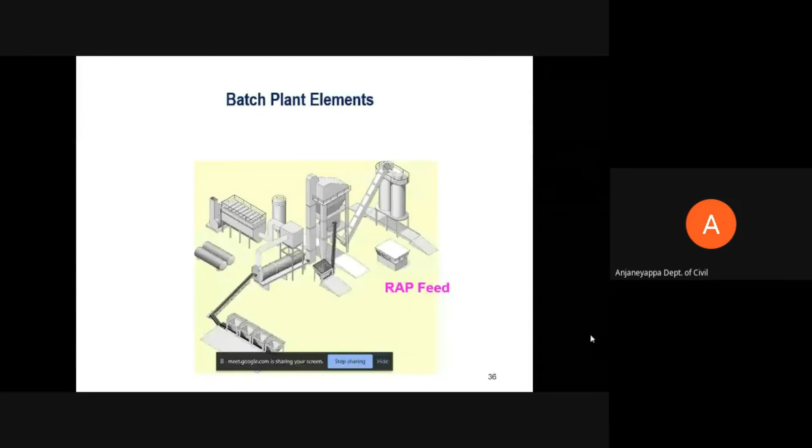Okay, so here what is shown - before that I'll show the other chart, and then come to that. This is a typical batch mix plant, weigh batch plant, and the flow diagram shown is for this plant. Here you can see the hopper bins - generally there will be 4 hopper bins. One hopper bin will have 12 mm aggregates, 6 mm aggregates, quarry dust, and 10 mm aggregates - 4 bins and 4 different types of materials. Depending upon our job mix formula and design, the openings below these hopper bins are adjusted, and the speed of this conveyor belt is adjusted. From these cold hopper bins, the aggregate storage bins, the mixed aggregates get into this unit, which is called the dryer. What is the function of this dryer?

These mixed aggregates are heated to the required temperature, only heated. Then these heated aggregates are taken to a bucket elevator in this tower type of plant to what is called the screening unit. These aggregates are screened here. There will be different types of sieves as per our requirement, and these heated aggregates are sieved. After sieving, they are stored in different bins - 12 mm, 10 mm, 6 mm and dust. Then they are weighed using weigh pads attached to these bins. That's why it's called a batch mix plant.

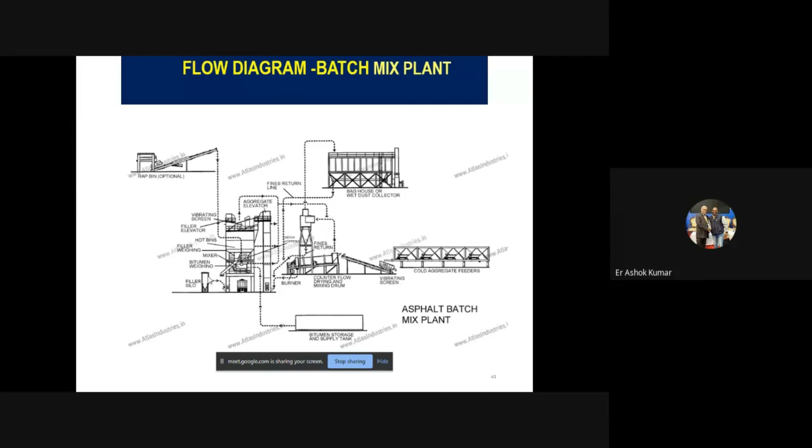It's a thumb rule only, based on the equipment's wear and tear and the surfaces. Many factors matter, including the location and temperature conditions. According to the location, the volume of the project is decided. If the width of the paving is more, the cost will be less. If the width is very less and you need to shift the paver more times, the cost will go up. It depends upon the project volume and site conditions.

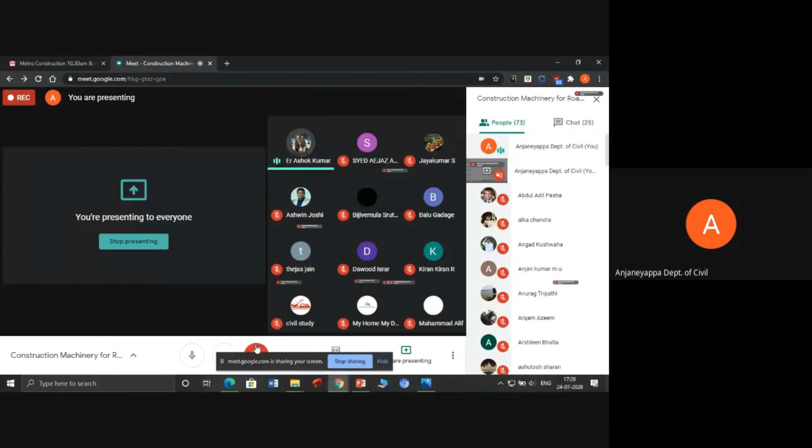Ashutosh Sharan from Alliance University asks whether the paving and compaction process is the same in flyovers and in curves. Is mastic asphalt used? No, but for any paving the general principle remains the same: it should be continuous. That's the general principle, whether it is curb paving, concrete paving, or asphalt mix paving.

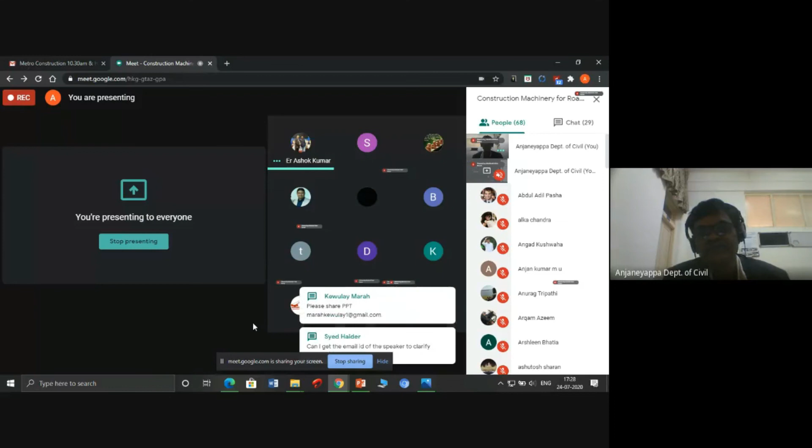Another question: in flyovers and structures, is the compaction the same procedure or different? Compaction remains the same for asphalt layers, depending upon the thickness. If it's a very thin layer, static compaction is sufficient; vibratory compaction is not required, or only mild vibrations. But the compaction operating procedure remains the same, whether on flyovers or at-grade roads.

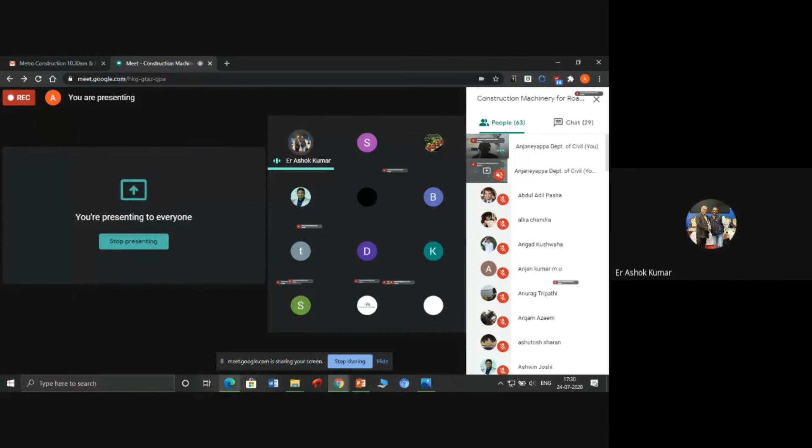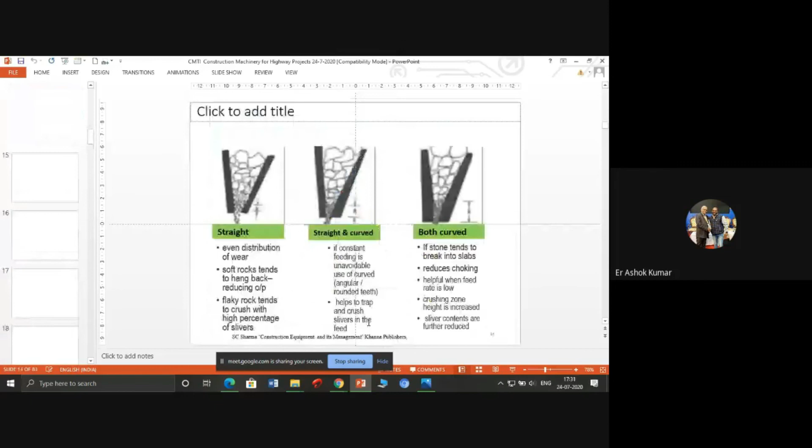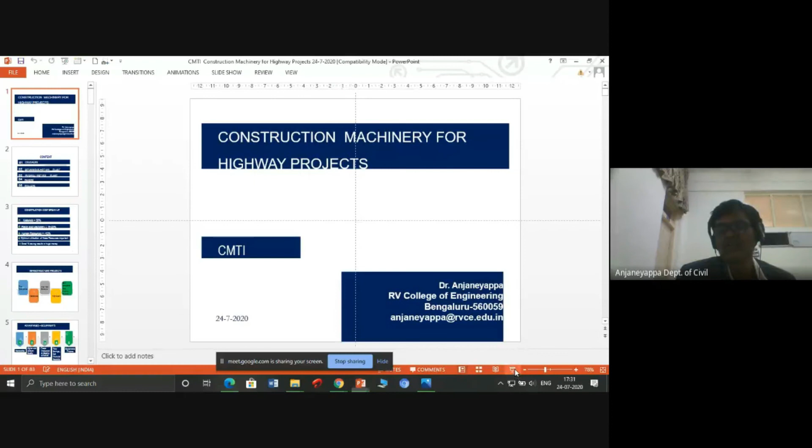The slide is in the last slide, it is there, no sir? I think it is here. Is the screen visible? You can take a picture of it. Is this visible? Yes, sir, it is visible.